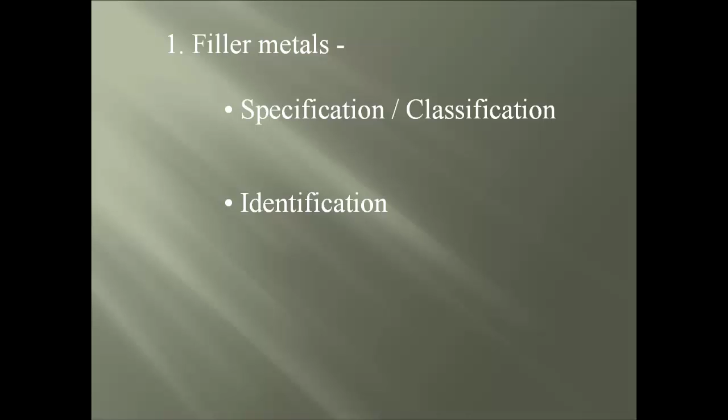As we just mentioned, the 2 processes use completely 2 different manufactured electrodes, and we'll show you how to quickly check the markings for compliance.

And lastly is probably the one area where more weld defects are traced back to, and that is the storage of the electrode, whether that is the shielded metal or flux core arc welding processes.

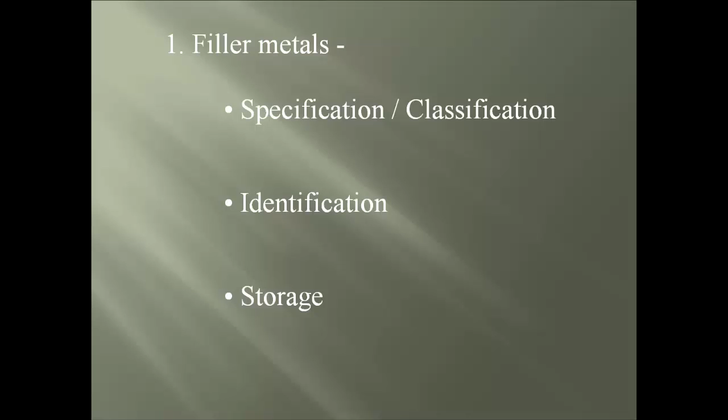I hope by now you are starting to understand there are steps to be followed if you want to have a correct weld joint, and with the filler metal there are no exceptions. So the first step is to understand the difference between the specification and classification meanings.

First, the specification is a document that creates the different categories provided by all the different manufacturers out there. What is the specification for filler metals, you may ask? Very good question.

The second item with the specification is that it establishes the classification for the filler metal. And once again, you may ask, what is the classification of electrode rods?

Here we see the AWS classification chart for a few filler metals. Notice, for mild steel, one classification is 6010. Then for mild steel, low alloy, it's 9010. And lastly, even for stainless steel, it's 15.

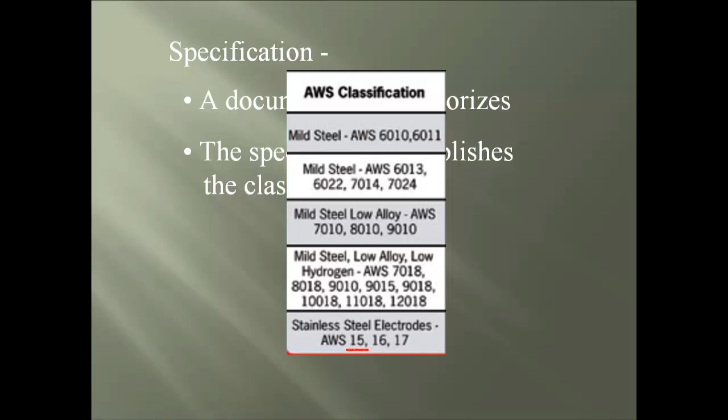But to close this topic of classification, the classification is a type being used for a group or category of steel material which has been established by testing. And this is for both the shielded metal and flux core arc welding processes.

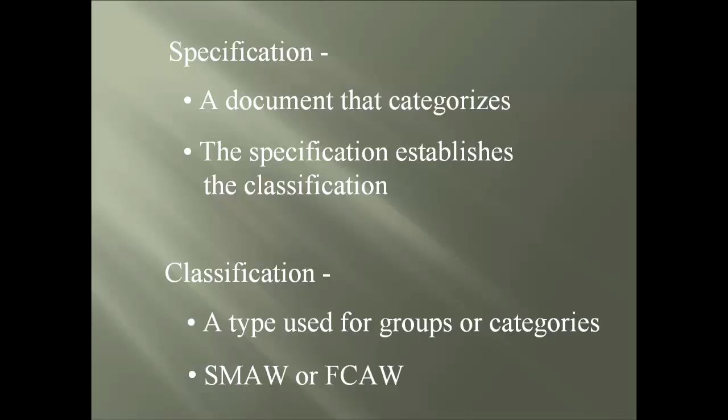First, the E stands for electrode. Then the next two numbers, 70, stand for the minimum tensile strength, 70,000 PSI of the metal rod. Now, there is some filler metal where a triple digit number will be listed, and that would mean the same.

The number 1 stands for the position that the filler metal can be welded in. A number 1 means all positions, and a number 2 means flat and horizontal positions only.

And lastly, the digit number 8, which represents the chemical makeup used around the metal rod, called a flux. And as with the tensile strength of the rod, there are dozens of different fluxes that have been established by testing for matching the different material and positions required.

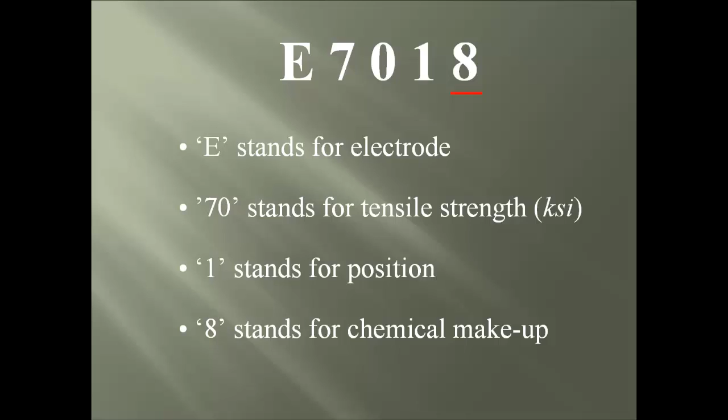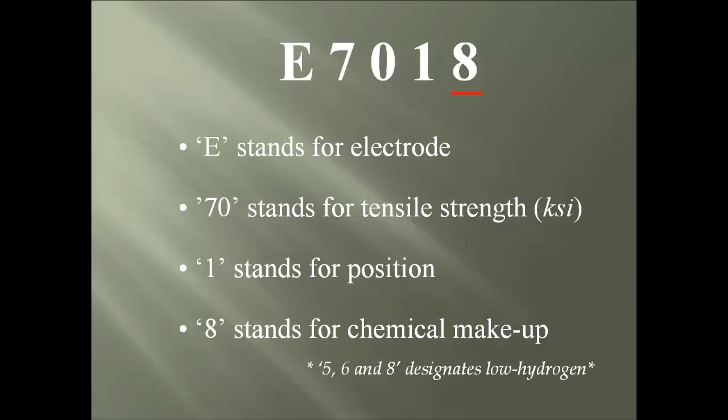And before we leave this topic, if the last numbers are either 5, 6, or 8, it will qualify for low hydrogen electrodes.

So the big difference with shielded metal and flux core arc welding processes is the different style of electrode used. With flux core, the chemical flux is inside a tubular metal rod, which allows it to bend without breaking the coating, and with shielded metal, the coating would break off if the rod is bent.

Now we break down each symbol found in the classification callout for the flux core arc welding filler metal. The E stands for electrode.

Next is the single digit 7, which stands for the minimum tensile strength, KSI, and in this case it would be 70,000 PSI.

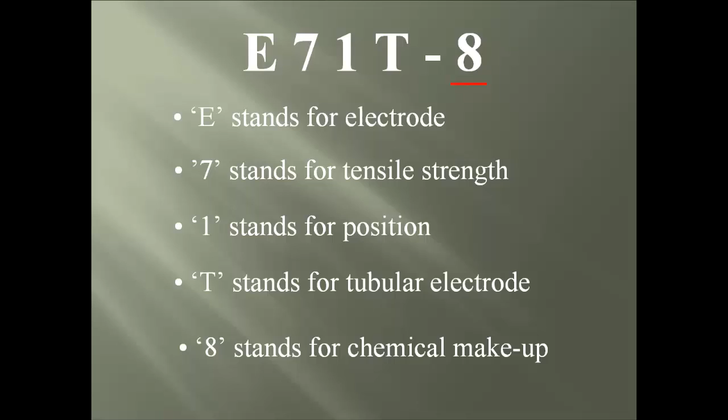And lastly, it's the number 8, which stands for the type of chemical makeup required for the process, and this has been established by the manufacturer testing.

Let's move into a section that causes many rejections within the weld, and many don't even realize why it caused it to begin with, and we are talking about improper storage of the filler metal.

First is the shielded metal arc welding filler metal. One way to store it properly is to bring in brand new electrodes, and the only way to have that is by using a hermetically sealed container. And what does hermetically sealed actually mean? It simply means airtight.

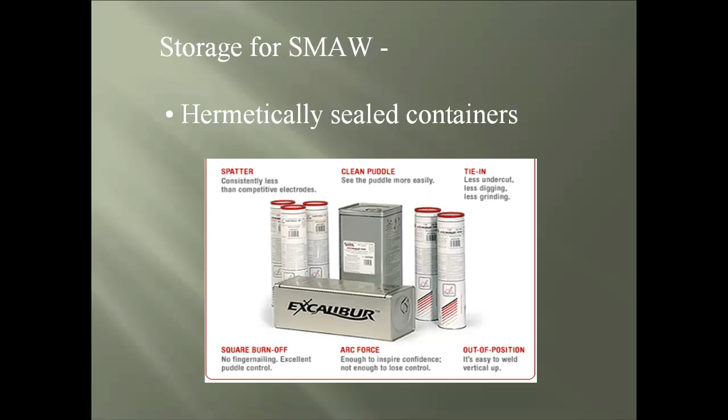The second way to store electrodes properly, if a brand new can is not used, will be to place the electrode in a proper heated environment at the required time exposure. As per the AWS code, and using our example of the low hydrogen electrode E7018, it can be exposed to the air after the hermetically sealed can is opened up to 4 hours.

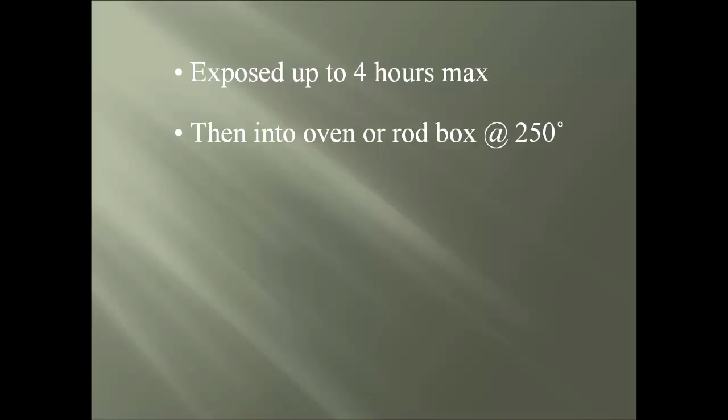Some other important items dealing with storing the electrodes are: you can only rebake the electrode once, so only take what you can use within 4 hours.

Next, the electrode can never get wet. If so, they must be discarded. And a little tip for spotting a wet electrode is looking for little round spots along the electrode flux.

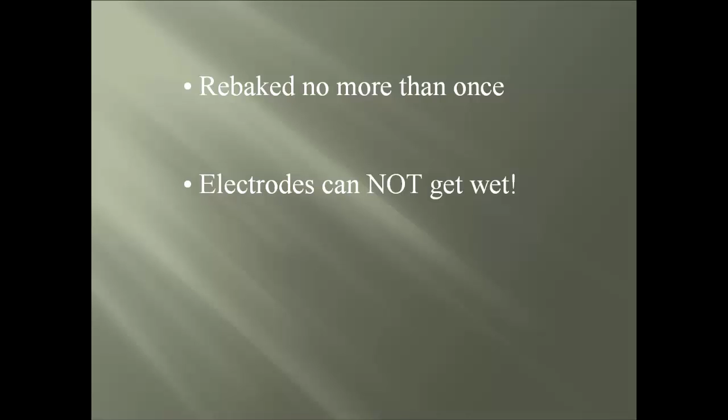And lastly, Table 5.1 of the D1.1 has established the minimum allowable exposure times for low hydrogen electrodes. Plus, there are also other tables provided for the other types of electrodes used throughout the industry. So please remember to review the code and also the manufacturer recommendations, plus the approved project specifications for compliance with the filler metal.

Now, let's look at how to store the flux core arc welding wire properly. Here's a typical box and spool of wire used for the flux core process.

First is to check that the spools are in a sealed plastic bag or foil package. If the seal is broken, that means the wire is being exposed to the air.

Second item is that the flux core arc welding wire exposure time is called diffusible hydrogen. In D1.8, it will cover this in detail. If you tried looking for information in D1.1, it will not give an actual time or temperature to store the wire after opening. That's where the manufacturer will have to be contacted for the established storing requirements. Also, don't forget to have the engineer of record review and approve.

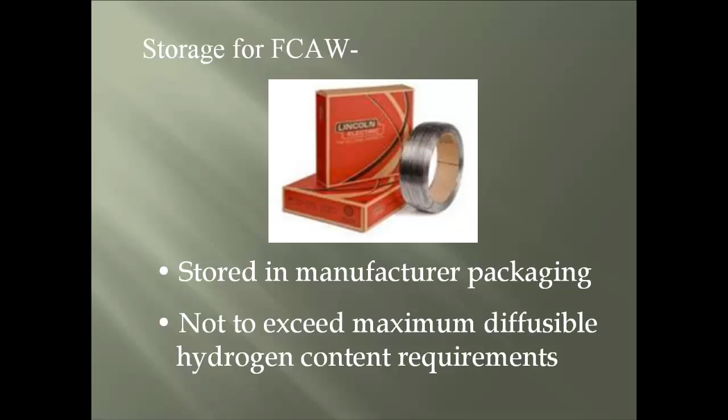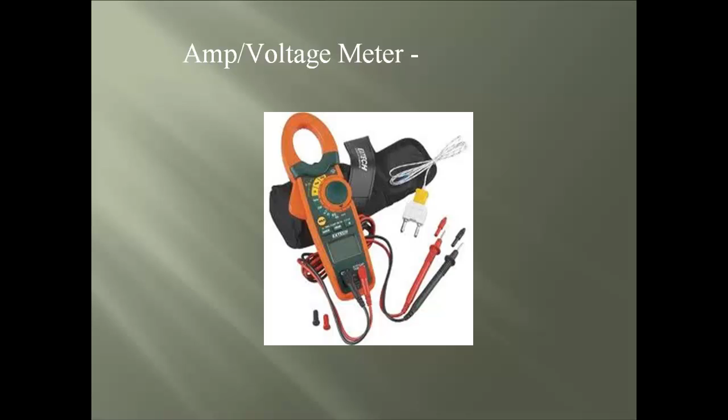The second topic of this segment is the how-to of the amp voltage meter. Here is a typical meter with items such as probes and the carrying case. Other key items of importance with the meter is to have a capacity of 2000 amps, or checking Nelson stud welding will never happen. Next, the meter must be both AC and DC current compatible. A hold button is very nice for registering the constant moving numbers when viewing both the amps and volts. Plus, the probes will be needed to check the volts.

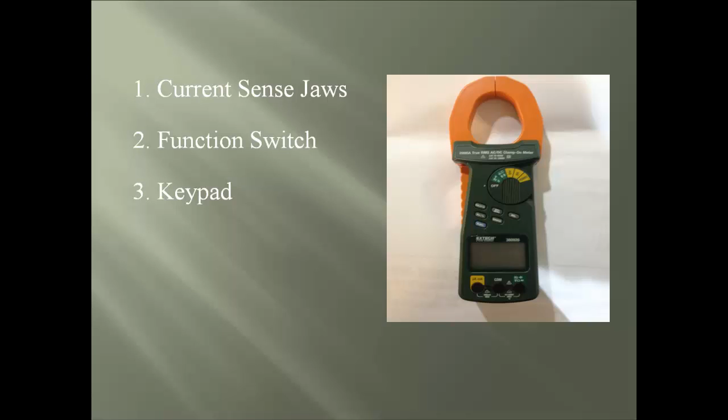Now we take a look at the functioning parts of an amp voltage meter. Number one is the clamp, which needs a lever control to open and close the jaws for reading the amps. Number two is the function switch, where the amps or current will be set prior to testing. Number three is the keypad, where the hold button and digital light is found. Number four is the LCD display screen, where the actual numbers of both the amps and volts are shown for reviewing during testing. Number five are the input jacks for the probes.

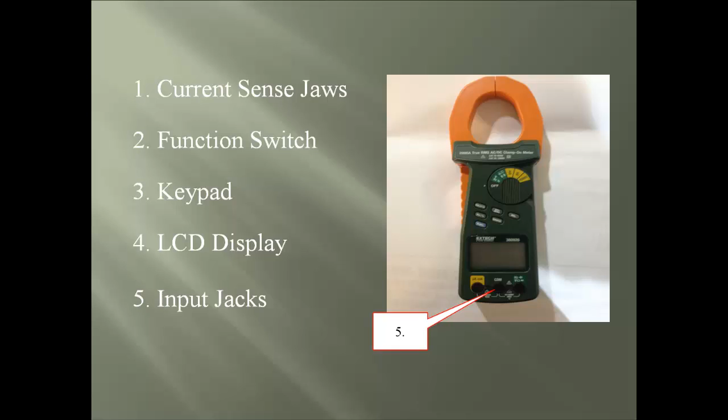Now, in a perfect world, red means positive and black is negative. But if you reverse the probes, it will still read okay. Just remember to place the probes on the welding equipment matching the setting on the amp. And lastly, the built-in stand and battery are found on the back side.

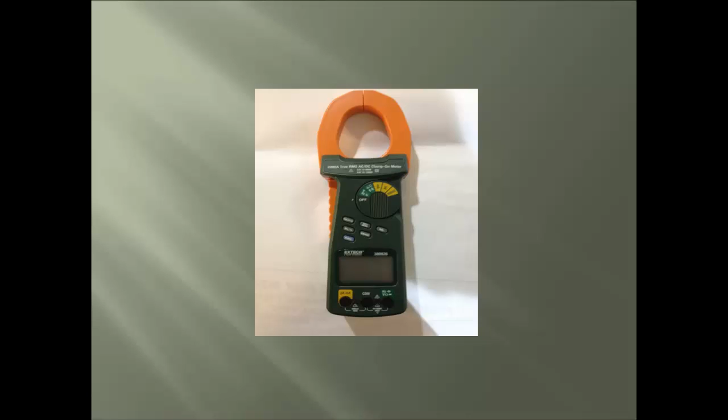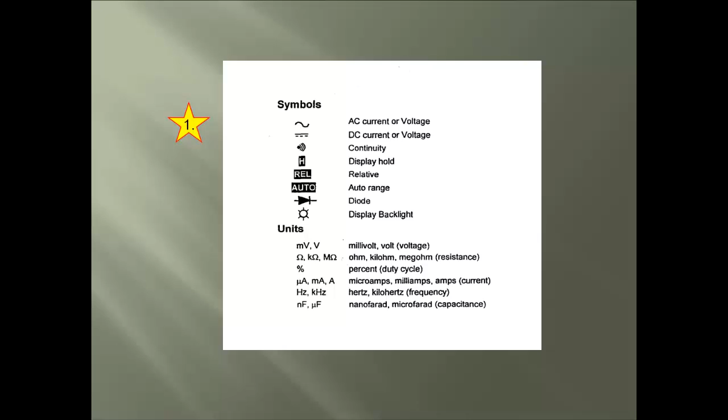Another important item to deal with, the function switch. Here you set the amps and current prior to testing. On this dial there are symbols, and here are three very important symbols to be aware of. Number one is the two different symbols for the AC and DC currents. Number two, the display hold button for recording the highest reading while testing. And number three is the button for display backlight, and there will always be those times when this is needed.

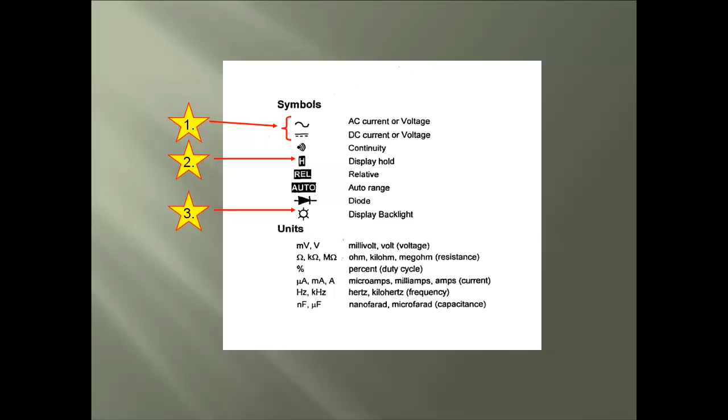Because if you tell someone they are wrong for not complying with the approved PQRs or WPSs, and you are not complying with the code and specifications yourself, there is an old saying in the industry: can you say back charge? So have your meter calibrated once a year, and when you buy a new meter, please ask if it has been calibrated by a certified third party. Usually the answer will be no, and you will have to pay extra for that step.

How to zero out the amp voltage meter. First step, set the meter to the proper current. Second step, push the button to zero the reading on the digital screen. And then your meter is ready to work.

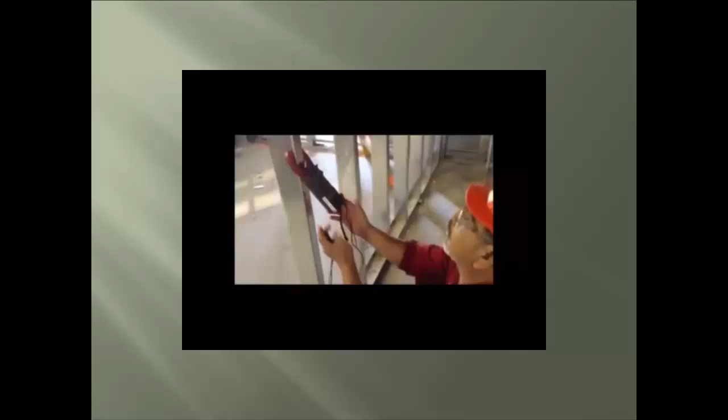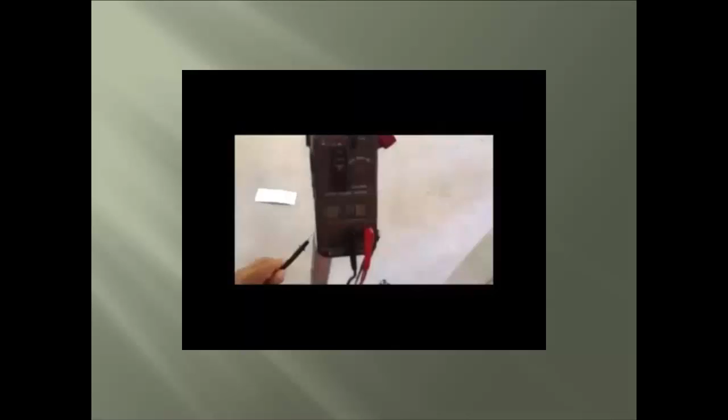How to check the volts using shielded metal arc welding. You will need the probes for testing. Set your meter to read volts. Then secure your meter. Then place one probe on the screw which is located on the twisted connection of the lead, and the other grounded. Take your readings of the volts while welding is in progress. Then record your volts readings.

How to check your amps for shielded metal arc welding. Set your meter to read amps. Use the clamp end of your meter within 10 feet of the welder. Take your reading of your amps as welding is in progress. Then log your amp readings when finished.

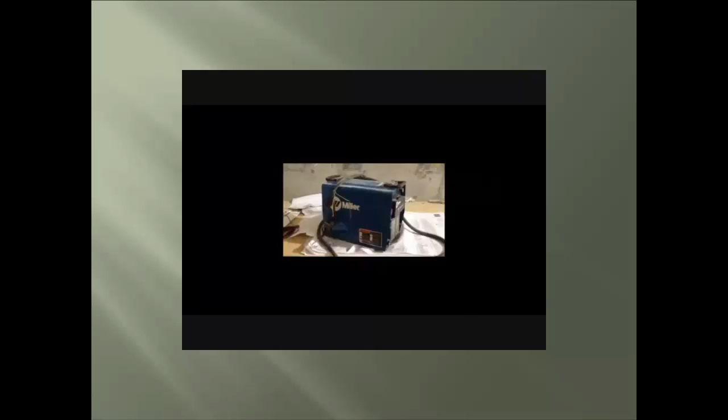How to use the meter on flux core arc welding. You have two pieces of equipment, the power source and the flux core welding box. With the power source, you must have constant voltage, CV. Here's where the control knob on the power source is located to set the machine to the CV setting. We now will see the wire feed knob that controls the wire speed coming out of the nozzle. Next we will see the CV switch located inside the flux core box.

How to check your volts. Set your meter to read volts.

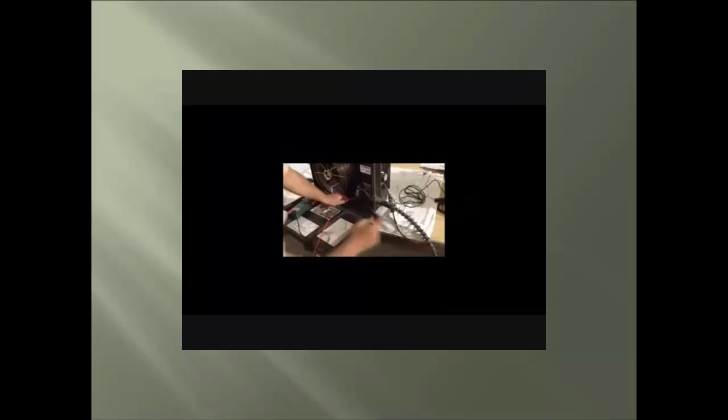Once again, take your probes, place one on the lead and the other on the ground clamp. Take a reading of the volts while welding is in progress. And please remember, watch out for the wire spool spinning.

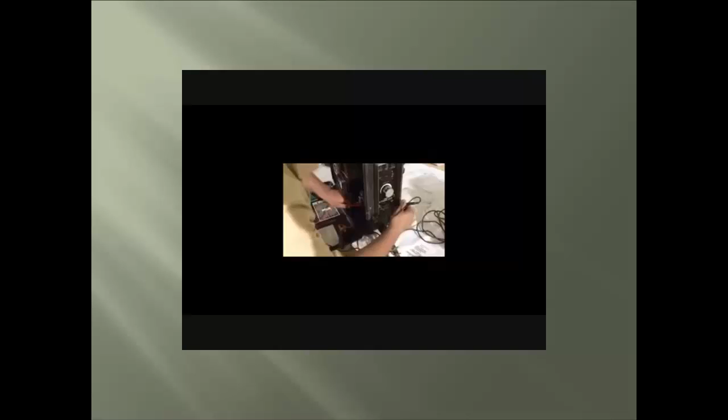Another option for the negative probe is to place it on the ground coming out of the flux core box.

How to check your amps. Set your meter to read amps. Use the clamp end of your meter around the wire, the leading wire. Take a reading of the amps as you clamp it around the welding lead while welding is in progress. Then log both volts and amp readings.

The last topic is the proper usage of the welding gauges. Now, there are many gauges offered to you, the QC and QA professional, and they all have their place in the industry. But we will show you how to measure a fillet and groove weld with the three most used gauges.

First are the individual fillet weld gauges. Next is the very versatile bridge cam gauge. And lastly is the best named gauge of all time, the VWAC gauge.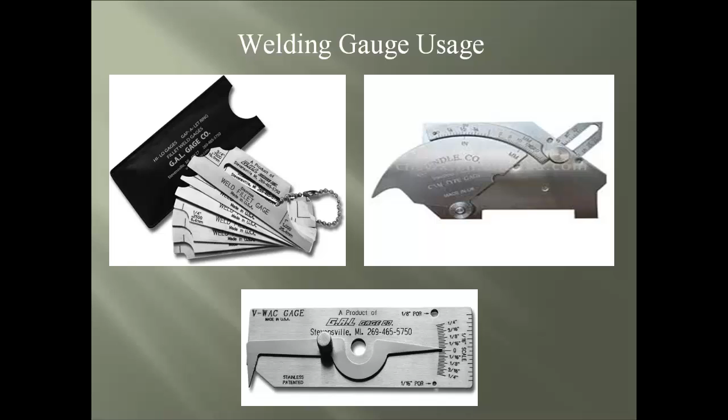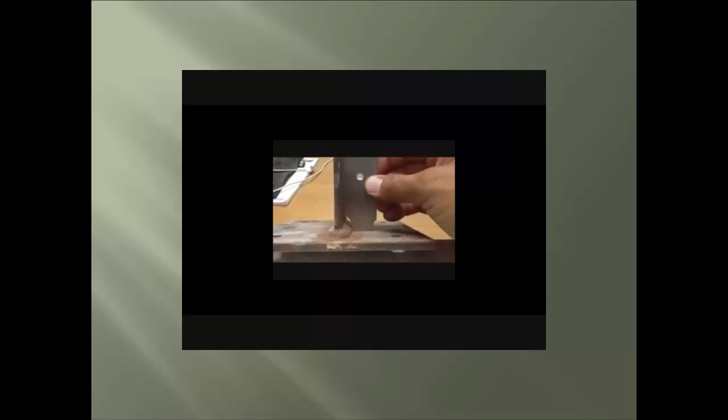How to measure a fillet weld with the individual plate gauge. We have a typical joint, a T-joint. You start with measuring the vertical leg. Flip the gauge over and check the horizontal leg length. Then turn the gauge itself over and you're able to check the face of the weld.

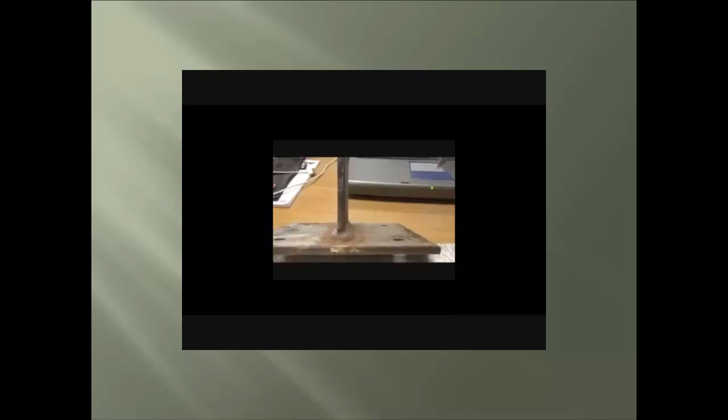How to measure a fillet weld with a bridge cam gauge. Same principle, but with this gauge it's a little easier to get in position. Put the point on the vertical leg, make the feet flat on the plate and take a reading. Then turn the gauge around to measure the horizontal leg, making sure the feet are flat on the plate.

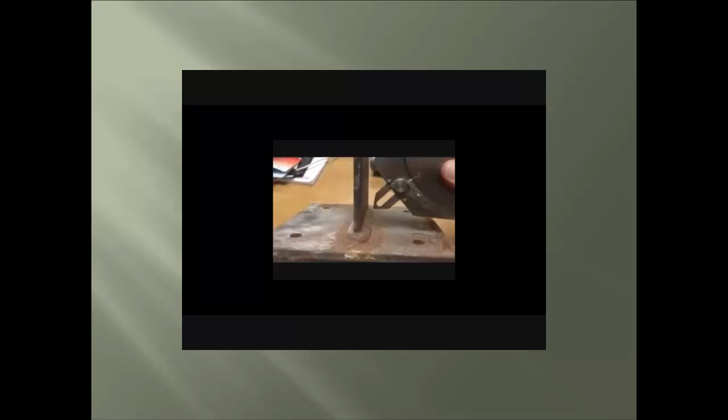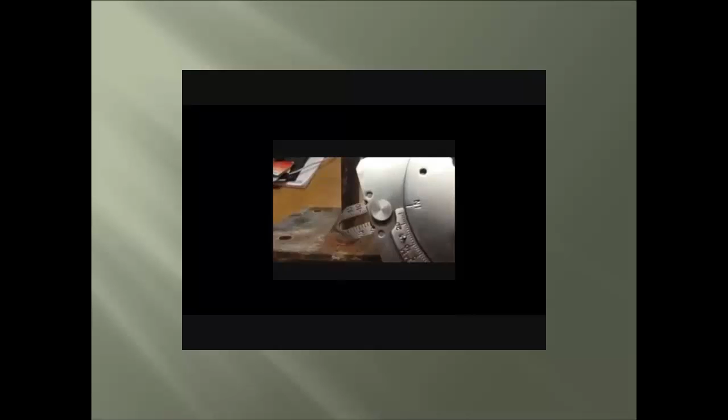To measure the face of the weld, flip the gauge over. It has this nice point gauge on it. When the gauge comes in flush with the plates, then you're able to take your reading. And shortest leg equals weld size.

How to measure a fillet weld, how to measure a groove weld: check the bevel of the plates. Here with the bridge cam gauge, a nice feature, have the legs flat on the piece of plate. Push the sliding face plate to match the bevel, and then you're able to take a reading of the degrees of bevel, which is basically 30 degrees here.

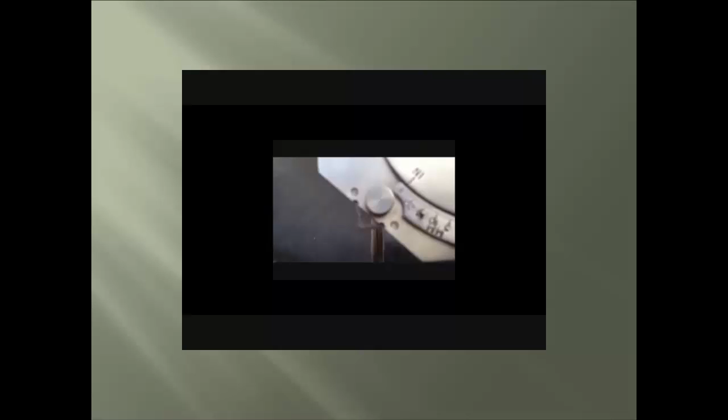Next is check the depth of preparation. You would take the bridge cam gauge, turn it over, and use the point measure. It will give you the depth of preparation. You'd be checking individual passes until completed.

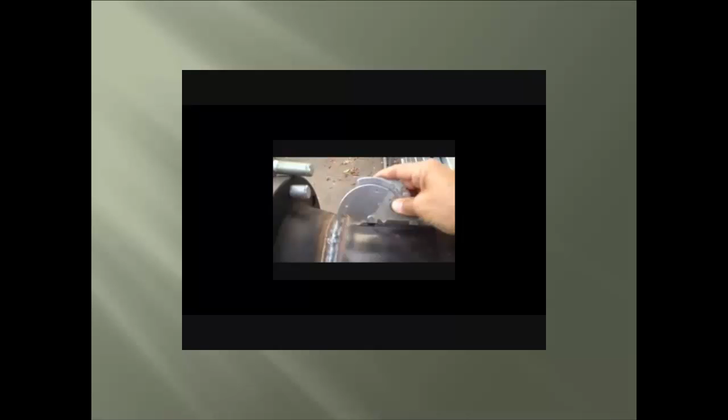Then to check the reinforcement of the groove weld, put the point of the gauge on top, have the feet come flush to the plate, and then take your reading.

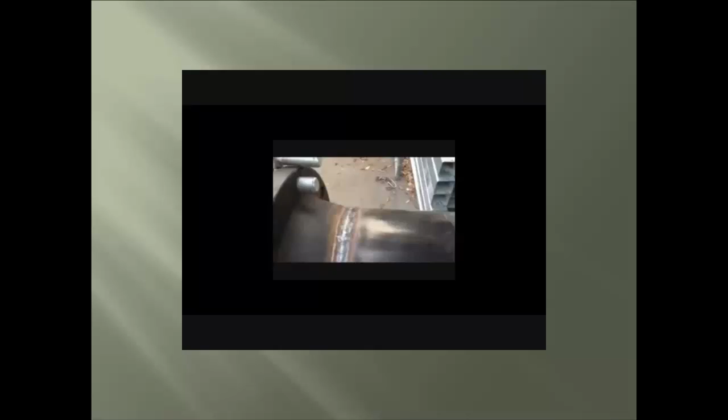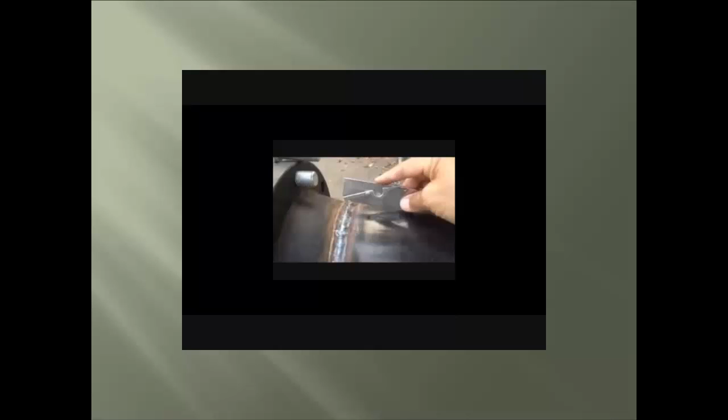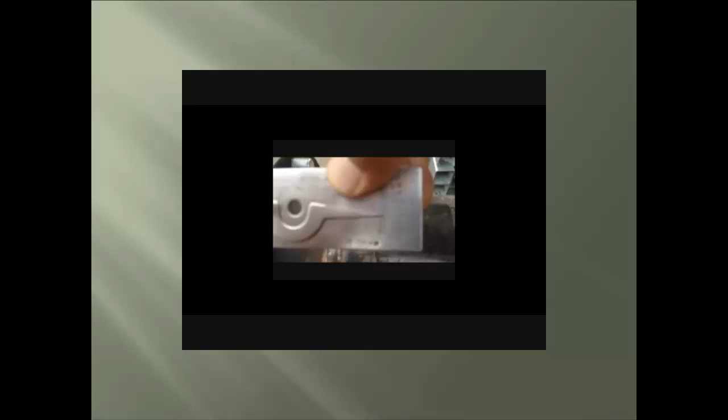We will see how to use the VWAC gauge for checking reinforcement of a groove weld. Same principle: put the point on the weld's face, push it down flush, and take a reading. Notice the little hole there on the right corner, that is for your size of your porosity measurements. And weld side is depth of preparation and reinforcement height.

We have come to the end of segment number 7, and let's review the topics we covered. First were filler metals for both the shielded metal and flux core arc welding processes. We learned the difference between a specification and classification, and what and where to find the classification callout on not only the electrode but also the wire spool. Plus, we covered why improper storage of the filler metal could be causing rejected welds during the production of welding.

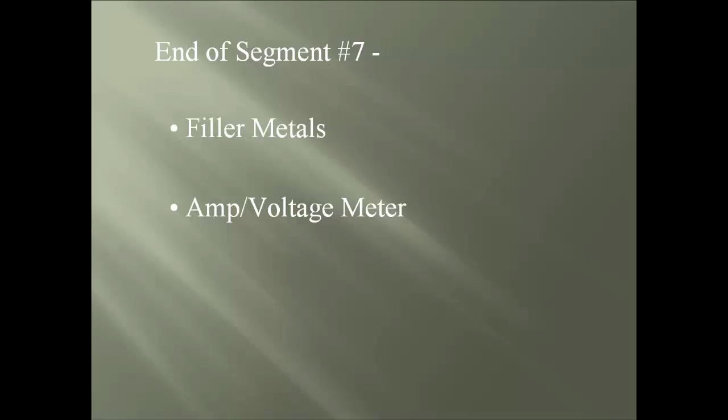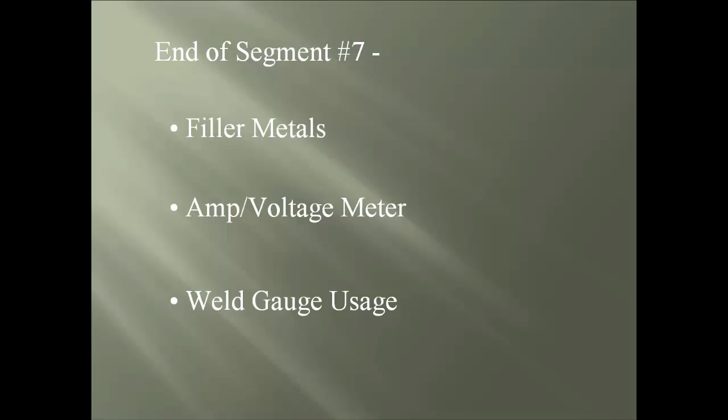Second, we covered information on the working parts and, more importantly, the proper setup for testing the weld equipment for both voltage and amperage with the amp voltage meter, while closing with a look at the difference between the industry leaders in weld gauges: the individual plate gauges, bridge cam gauge, and the VWAC gauge. Plus, we showed the proper way to measure items like the fillet leg to the reinforcement on a groove.

The study material for this segment will have you reading the following: Shielded Metal Arc Welding Filler Metal Guide. Next is the Flux Core Arc Welding Filler Metal Guide. Then we move into the guide for the amp volt meter, and finish with a very well written document from the Oklahoma Department of Transportation about the welding acceptance guidelines.